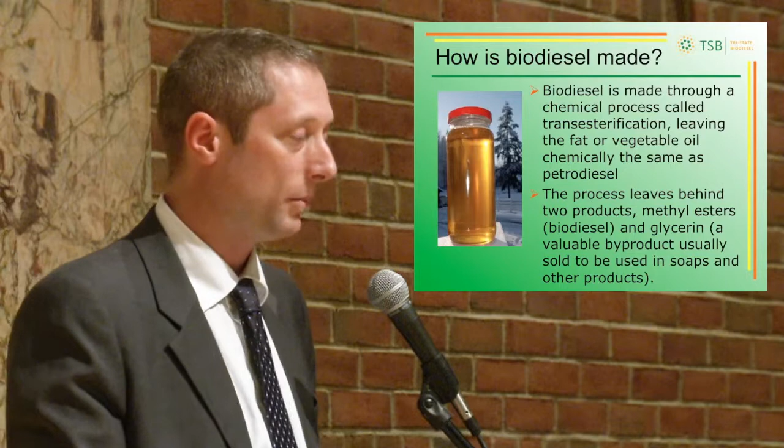Both products, the biodiesel and the glycerin, are completely biodegradable and non-toxic. Biodiesel can be made from many different oil, seed, and animal products. This is a rundown of some of the most widely used oilseed plants across the world.

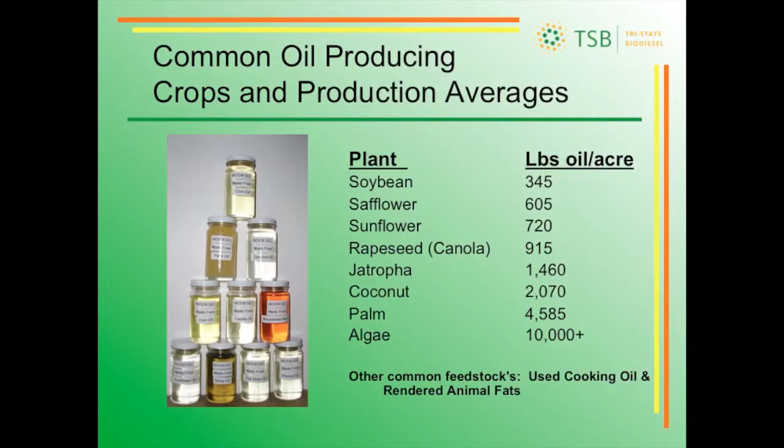Now the diesel in biodiesel, that was actually a person named Rudolf Diesel who initially invented the diesel engine. A little bit of history about diesel to begin with: everything that we do, everything that we eat, everything that we wear here in America and around the world is either brought to us or facilitated by some kind of engine that runs on diesel fuel.

The reason the fuel is called diesel is because the man who invented the engine which burns that fuel was this guy named Rudolf Diesel, a real genius at the beginning of the industrial age. He opened up the dawn of the industrial age when he created the first internal combustion engine.

This guy was a real controversial figure. He had a lot of idealistic ideas around creating machines that could help people live in rural areas and far out areas and decentralized locations.

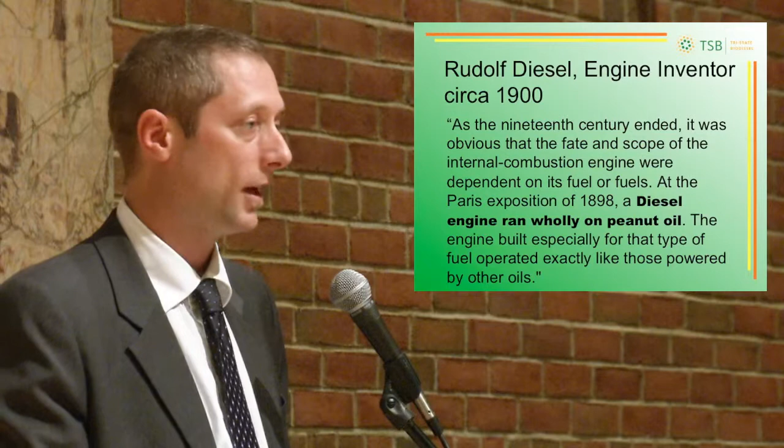Now, the engine stood as an example of his vision. He hoped that it could be something that could help people, not only in the colonies, as he referred to them, which would be America and different tropical regions, areas where Europeans were going out and setting up their colonies.

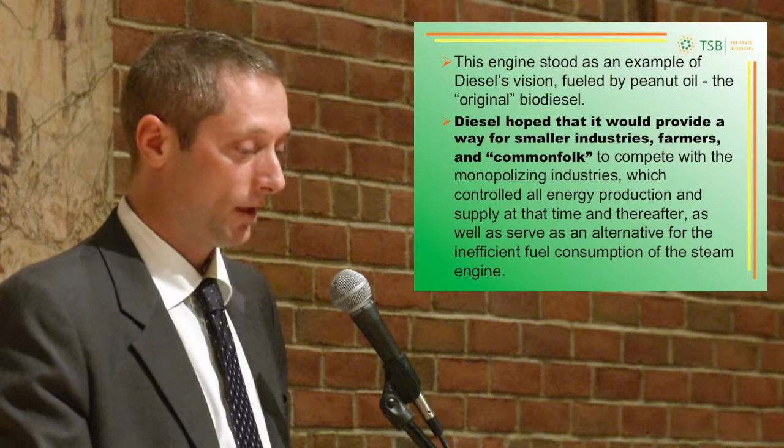This is a couple of quotes here I have from him, which I won't read, but I'll leave them up for a second so people can get an idea of what he was about. Basically, we're talking about looking towards renewable sources that are produced from the heat of the sun, rather than looking towards what we can dig up from the ground and what we can synthesize.

Rudolf Diesel disappeared, unfortunately, at a certain point. There's a lot of stories around how that happened, but the most compelling and probable reason is that he was really interested in offering the world a substitute that was renewable and decentralized. This was at the moment the petroleum industry was becoming bigger, and there was a push at that point to centralize people's subsistence and dependency on fuel sources, rather than give people the opportunity to take care of themselves.

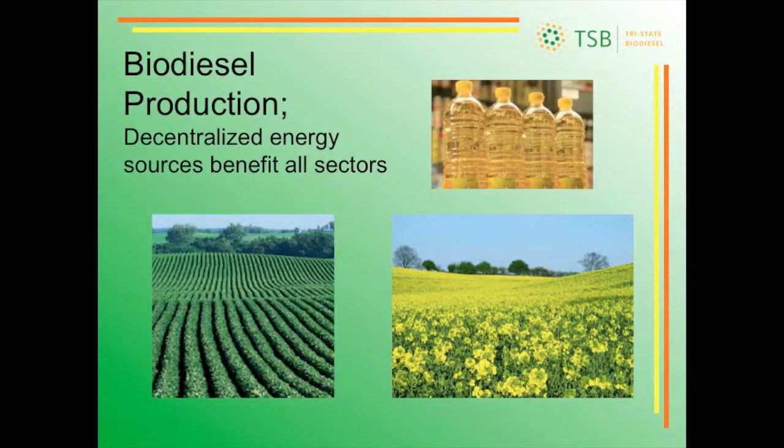The Biodiesel Advantage: the EPA recently designated biodiesel as the first advanced biofuel to market. It's the lowest price light oil option currently, and in New York State we have a lot of state incentives which help bring the price even lower.

It's a very high quality fuel with superior solvent, lubricity, and cetane qualities. Cetane is basically like an octane equivalent for diesel fuel. Octane is the power rating of gasoline, while cetane is the actual power output quality of diesel fuel.

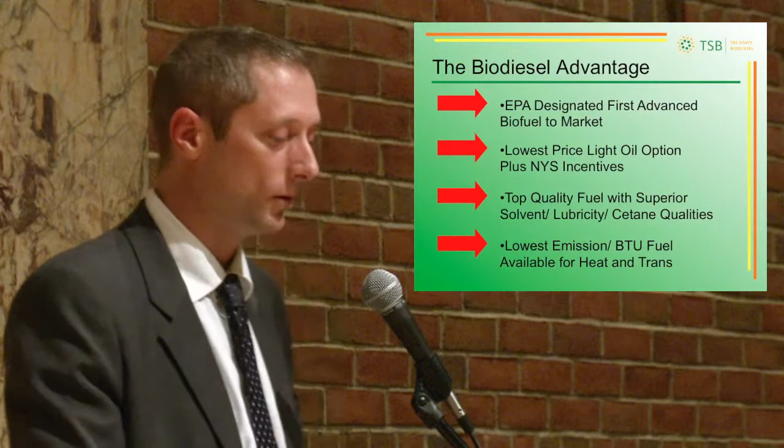It also has the lowest emissions per BTU of any fuel available for heat and transportation. Biodiesel can be used for both heating and transportation in any type of blend mixed with diesel fuel, from 1% up to 99%, or pure, which we call B100.

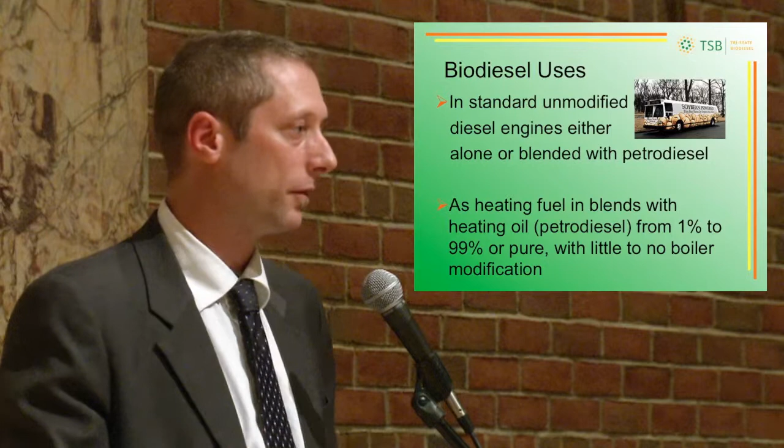The terminology with biodiesel is B and then a number. The number stands for the percentage of biodiesel in the blend of the fuel, the other percentage being diesel fuel.

Diesel fuel is really heating oil. It's also what we use for trucks, larger vehicles, and so on in the United States. Diesel fuel is often more used across the board on other continents, for example Asia and Europe.

They run regular passenger cars and most vehicles on diesel fuel, whereas here in the United States we're more looking at smaller vehicles being run by gasoline.

But here in the States, not a lot of people realize that it's actually diesel fuel that's heating our buildings. When we refer to number 6 oil, number 2 oil, number 4 oil, those are actually different grades of a distillate from crude oil.

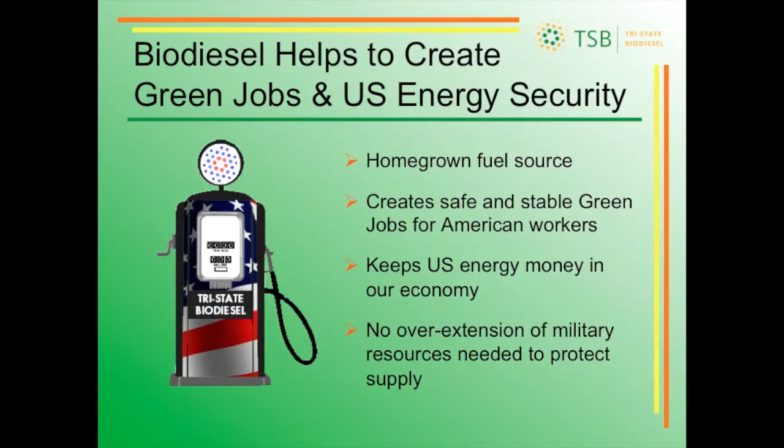Now these are a few bullet points as to what are the benefits from biodiesel. It's a homegrown source. It creates a lot of green and safe, stable jobs here domestically. It keeps our U.S. energy dollars in the country, and we see no overextension of military resources to protect that. It's a reliable fuel. It's safe.

There's a much higher flash point than gasoline or even diesel fuel. It's biodegradable, and as we move forward with more widely publicized information about biodiesel, more original equipment manufacturers (OEM) are accepting that biodiesel can be used in many different applications. B100 is what we refer to as pure biodiesel.

This is a picture of a boiler from the Brookhaven National Lab. Brookhaven National Labs out in Long Island have been working tirelessly for about a decade studying the best way to set up a boiler system for a building to accept biodiesel in many different blends, and they've come to accept that biodiesel in its pure form is just as usable and applicable as any kind of pure distillate petroleum diesel heating oil in any different blend.

Here we have a few different challenges and opportunities outlined by using B100 for heat. A couple challenges are the storage and the handling.

The storage of biodiesel is only a challenge in lower temperatures depending on the source of the biodiesel, whether it be from animal or from a different kind of seed crop. Tallow-based biodiesel will gel at a higher temperature, so it's really more suitable for warmer climates.

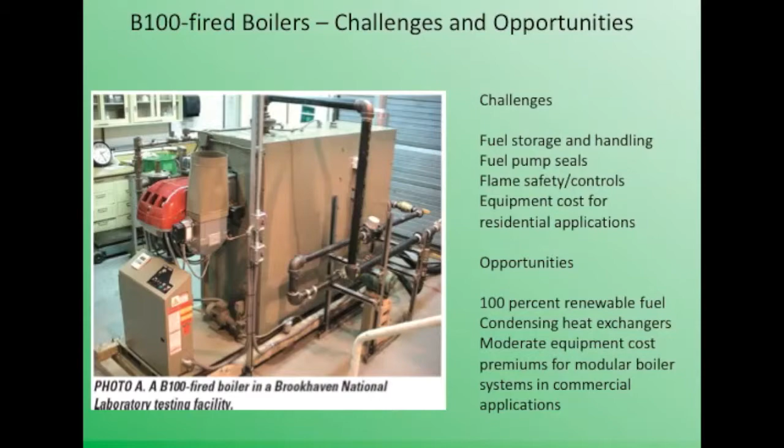The challenges include slight boiler modifications and equipment costs in order to set up a building to accept biodiesel, but they're much lower than gas costs.

The opportunities obviously are that it's a renewable fuel. It's something that we can grow crops of every year.

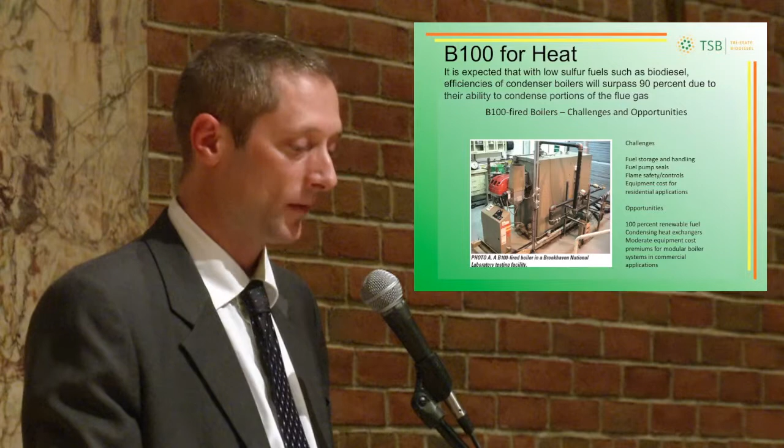A filter change would be the first and foremost problem one could expect from putting biodiesel into a heating oil system. Because of the solvent nature of biodiesel, it cleans up the residue and sludge left over from diesel, and deposits it in the filter. So often when you switch to biodiesel, you see a boiler shutdown due to clogging of the filter, as the biodiesel dissolves that old sludge and sticks it in the filter.

We found that with most buildings we service, about 1 in 10 has a shutdown due to a filter clog, which can be remedied right away with a filter change and a refire of the boiler, and it starts right back up. It's basically a 15-minute, $10 scenario.

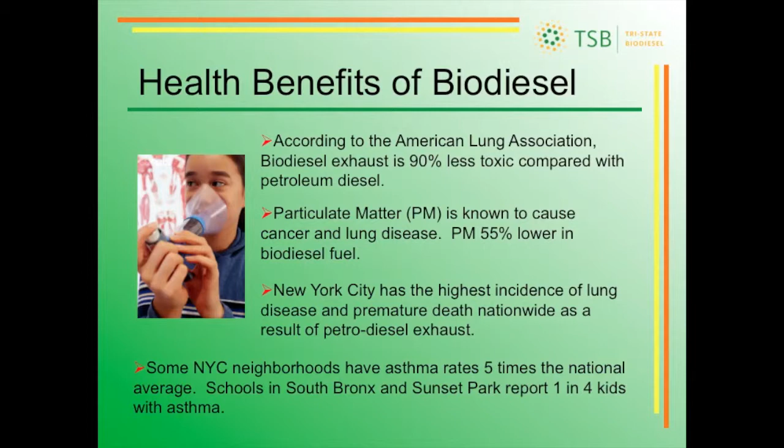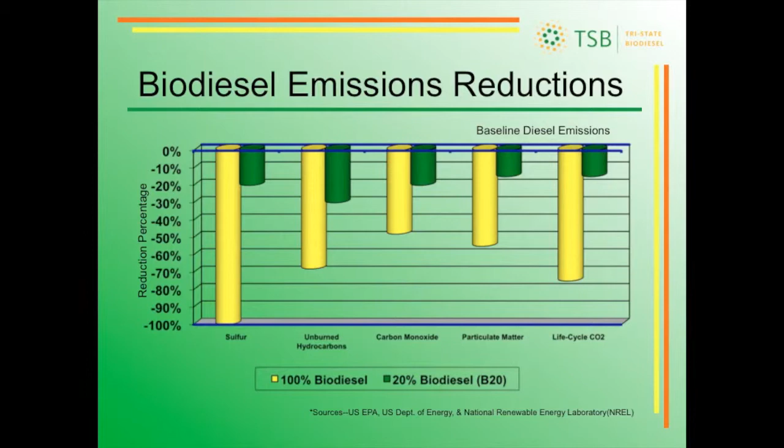There are many health benefits of biodiesel. Here in New York, we have the highest rate of asthma in the country. This is a drop-down chart of B100 emissions versus B20 emissions. The top shows baseline diesel emissions, and then you see the reductions in sulfur, unburned hydrocarbons, and carbon monoxide. particulate matter. B100 is in yellow, and the green represents the 20% blend.

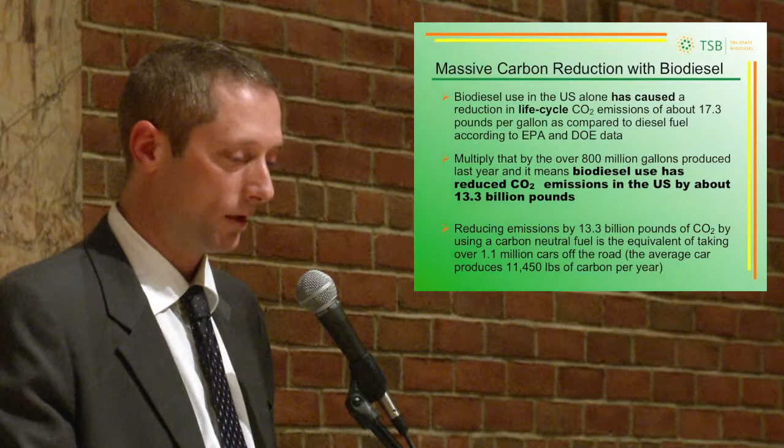There's a massive carbon reduction with biodiesel. We're looking at up to 17.3 pounds per gallon saved as compared to diesel fuel.

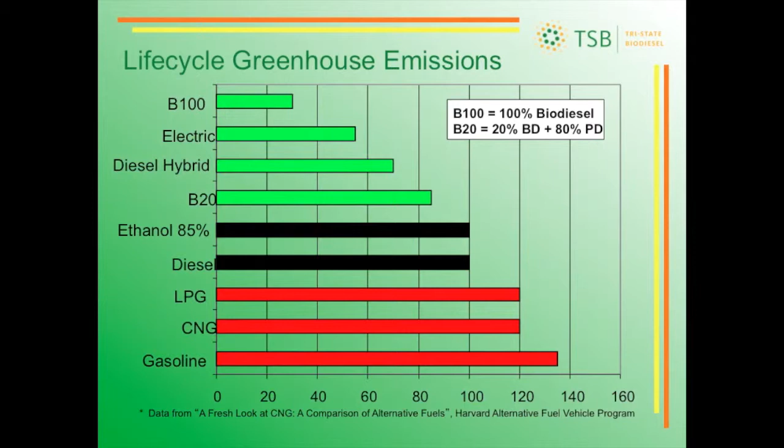Anti-biodiesel hysteria is not supported by science. There are a lot of studies done by the Department of Energy and the USDA that have resulted in findings like this, where gasoline has the highest carbon emissions, CNG and LPG being the next two, and B100 being the best.

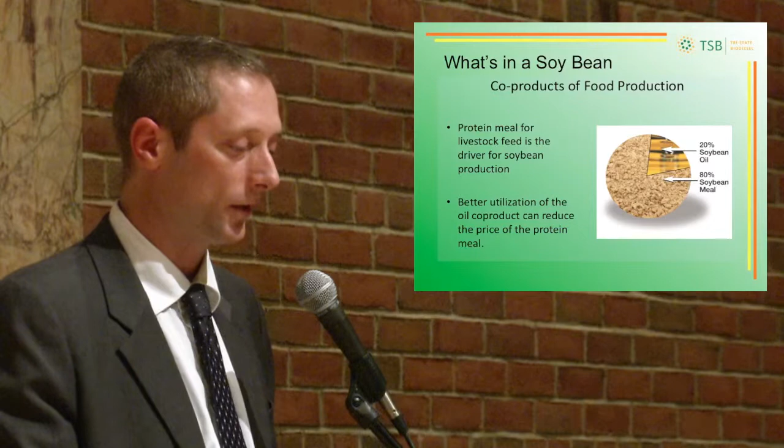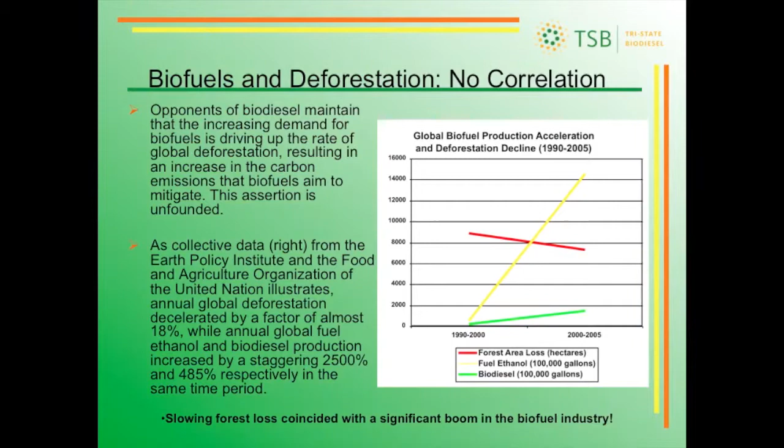Land use for crops to create biodiesel has stayed steady, while the production of biodiesel across the board has gone up dramatically in the last 10 years. Here's a quick land use chart. There's a bunch of information here I don't have time to get into now, but I'd be happy to go over it with anyone interested after the discussion.

There are a couple of attractive incentives for biodiesel from the state. If you switch to even a B20 blend, the state gives back 20 cents per gallon for either B20 or B100, which you get back with your state tax return.

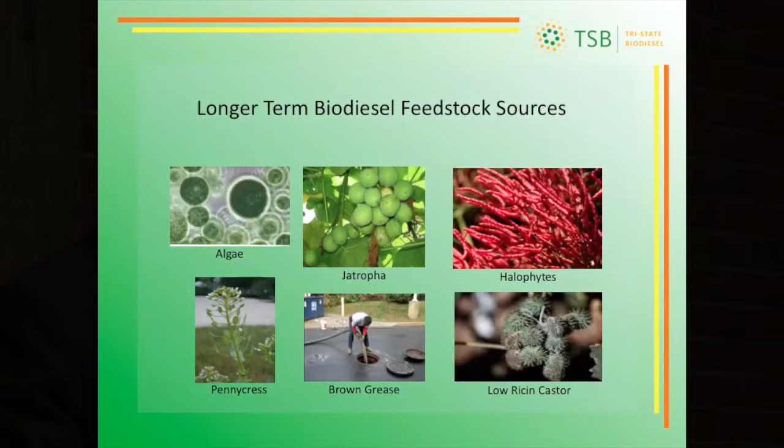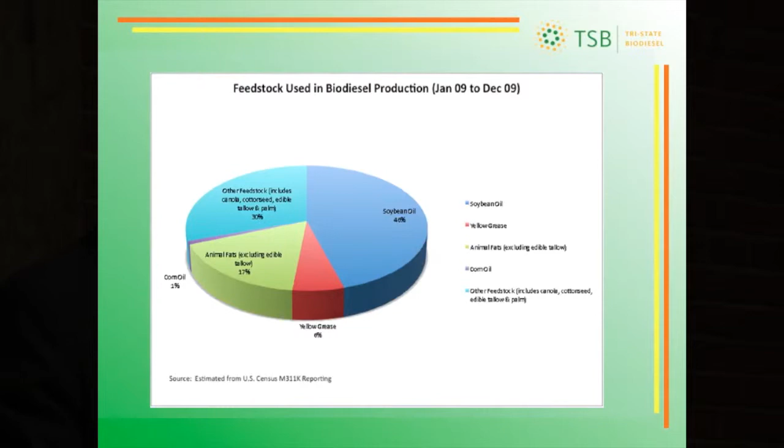There are many options for biodiesel production. Pennycress is a rotating crop you can use off-season through the winter, which continues to produce fuel. Camelina is another one; great studies have been done on this as a jet fuel replacement, which is essentially diesel fuel. Crop rotation and responsible agriculture would lead to a great future in scaling up the use of biodiesel as a direct diesel replacement.

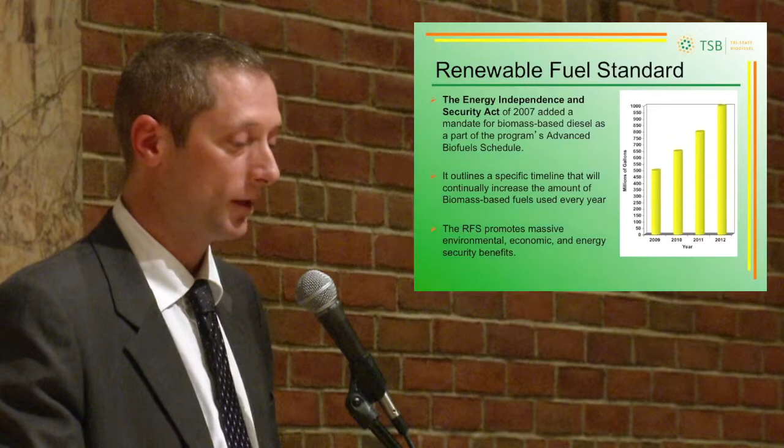It's something we really look forward to as a replacement for diesel as we phase out other fuels through responsible agriculture and efficiency practices. Thank you very much.